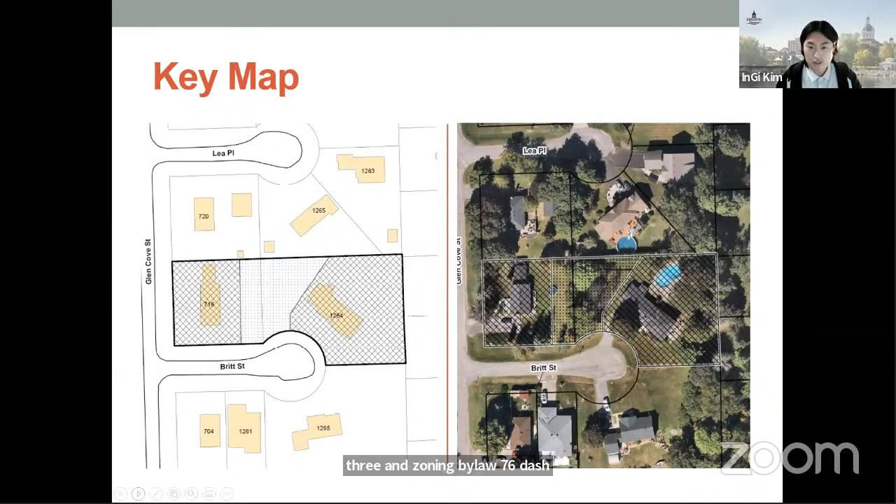Next slide, please. To give a quick overview, the applicant is seeking to create a new residential lot on the subject properties with 2 consent applications. The first application will sever a portion of the land at 1264 Britt Street, and the second application will sever a portion of the land at 716 Glen Cove and will be merged with the severed lot at 1264 Britt Street. Existing single-family dwellings will remain on the retained parcels, and both retained parcels and the newly created lot will comply with the minimum lot area and lot frontage required under the zoning bylaw.

Next slide, please. So the size of the severed and retained parcels are comparable to the existing residential lots in the area. Any future development on site will be subject to zoning provisions, including minimum front yard depth, rear yard depth, and side yard width. Finally, the proposed development will have no negative impact on the existing streetscape, as the retained parcels will maintain their existing accesses. Any new and or altered accesses to the property will require an entranceway permit.

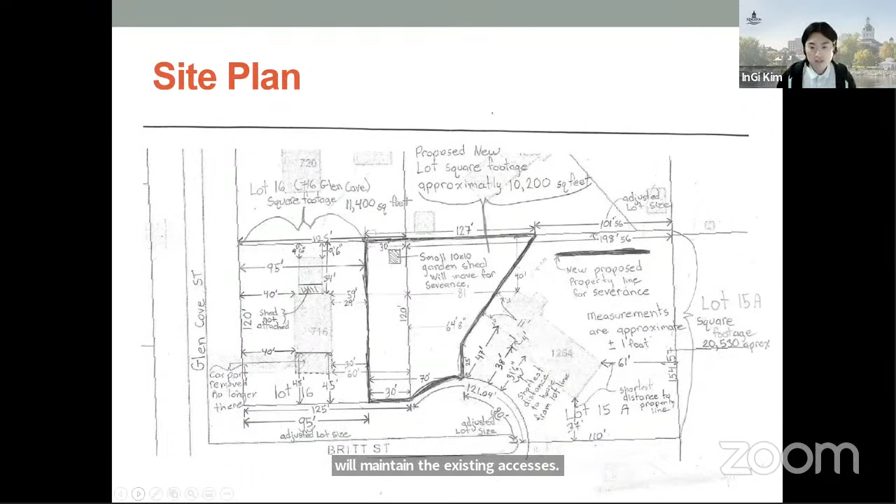Next slide, please. With respect to public consultation, a public notice sign was posted, a notice was mailed, and notification was made available in the Kingston Whig-Standard. As previously mentioned, these applications were moved up for your consideration as public comments were made during the delegated authority process, and a summary of public comments received and staff responses were included in the staff report for your consideration.

Next slide, please. In conclusion, this application is being recommended for approval to allow the creation of one new residential lot. The proposal maintains the general intent and purpose of both the official plan and zoning bylaw, and the proposal will improve the function of the underutilized portion of the site and represents good land use planning. With that, thank you, and I'll be happy to answer any questions.

Great, thank you very much for that. So at this point, I'd like to call on the applicant or their agent to identify yourselves by name and address for our record, please.

Hello, my name is Mark Labrie. I live at 1264 Britt Street.

And you are actually the owner? Yes, I'm the owner of both properties. Thanks very much for being here. Is there anything further you want to add to the application this evening? No, I worked hard to make sure it was within the rules of the city.

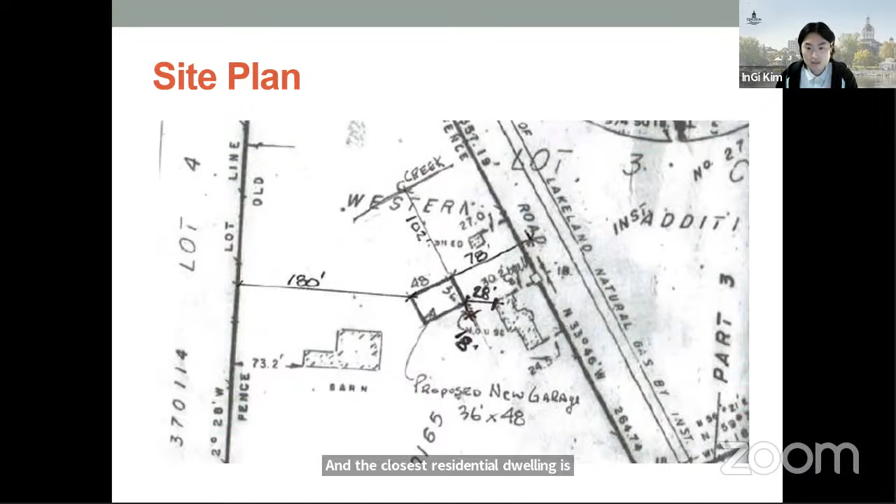The purpose and intent of a maximum accessory building height is to ensure that they do not dominate a property and do not have any negative impacts on the abutting properties. This site is sufficiently large and the building is well set back from neighboring properties and lot lines, reducing its overall impact on the surrounding area.

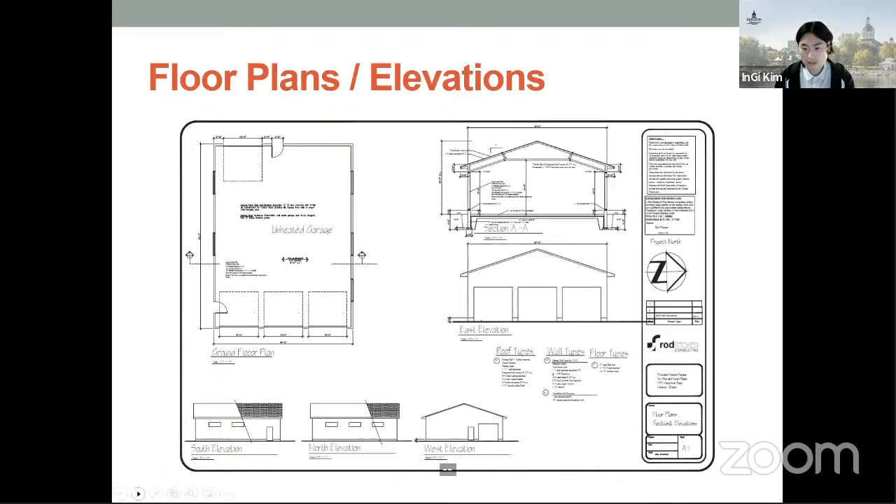With respect to public consultation, a public notice sign was posted, a notice was mailed to 14 property owners, and notification was made available in the Kingston Whig-Standard. To date, no public comments have been received.

In conclusion, the application is being recommended for approval to allow the construction of a new detached accessory building in the rear yard. The requested variance maintains the general intent and purpose of both the official plan and zoning bylaw. Further, the requested variance is minor in nature, and the proposed accessory building will improve the function of the existing residential use on the site. Thank you, and I'm happy to answer any questions regarding this application.

Thank you very much for that. At this point, I'd like to call on the applicant or their agent to identify themselves by name and address. It's Rod Stokes, I'm the agent for the owners, and my address is 324 Renda Street, Kingston. Thank you, Mr. Stokes. Is there anything further you want to add to the application? No, I think it's been covered quite well, but if there are any questions, I'd be glad to address them.

Very good, thank you. I'll call on the committee members. Do you have any questions of either the applicant or staff? If I may. Yes, Jordan.

Mr. Stokes, the sportsplex just down the road, it's a lot higher than 20 feet, right, in terms of the height of the structure? Most definitely. I honestly don't have the height of it, but I'm guessing it's probably as much as twice as high. I can think of the area, so I'm just curious because I don't think it'll be an eyesore at all. Thank you, sir.

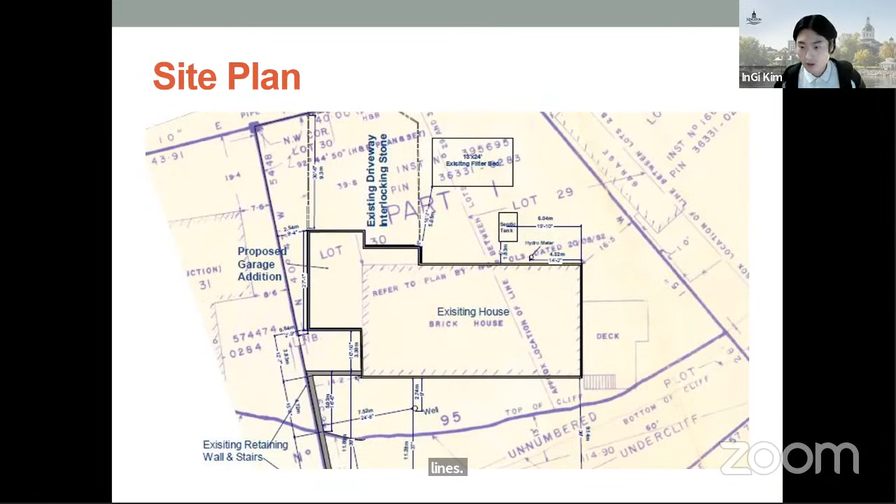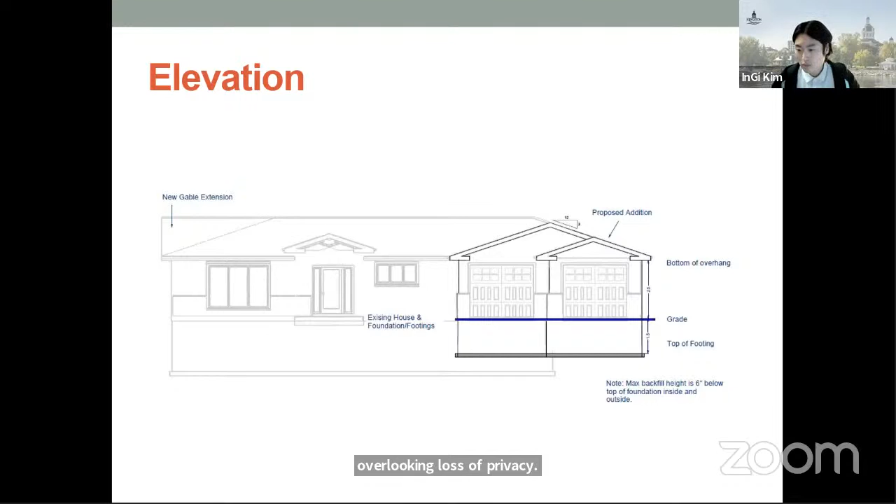The scale and design of the proposed development will be compatible with surrounding uses in terms of overlook or loss of privacy. No adverse effects are anticipated. There are no windows proposed on the west side of the building. Additionally, there is existing vegetation which will provide additional screening to the abutting property.

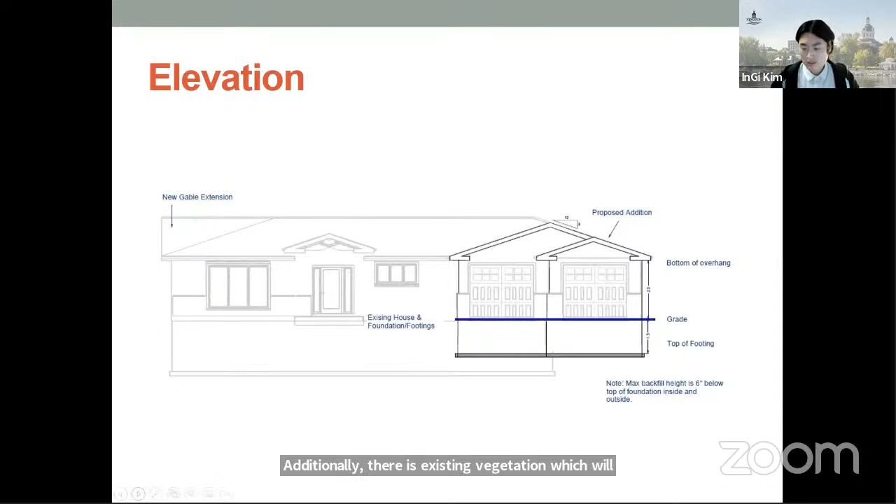With respect to public consultation, a public notice sign was posted, a notice was mailed to 18 property owners, and notification was made available in the Kingston Whig-Standard. To date, no public comments have been received for this application.

In conclusion, the application is being recommended for approval to allow the expansion of the existing attached garage in order to accommodate 2 vehicles. The requested variance maintains the general intent and purpose of both the official plan and zoning bylaw. Further, the requested variance is minor in nature and the proposed development represents good land use planning and will improve the function of the existing residential use on the site. Thank you, and I'll be happy to answer any questions.

Okay, I would like to call on the applicant and/or their agent to identify themselves by name and address.

Hi, Ron Voskamp, I'm the homeowner. Address is 39 Rudd Avenue.

Do you have anything to add to the application? I thought InGi did a great job presenting the information. Okay, thank you. So now, committee members, do you have any questions for the applicant or agent?

If I may, Mr. Vice Chair. So my calculation here, 1.66 meters means it's a reduction to 5'5" here. Are we losing any vegetation, any trees in the addition here with this garage? There's a couple of trees that have already been severely pruned, I guess, because they've been growing into our neighbor's house. Okay, but you still got other trees on the side there that's going to give you some coverage. There is, exactly, especially more towards the road. Thank you, sir.

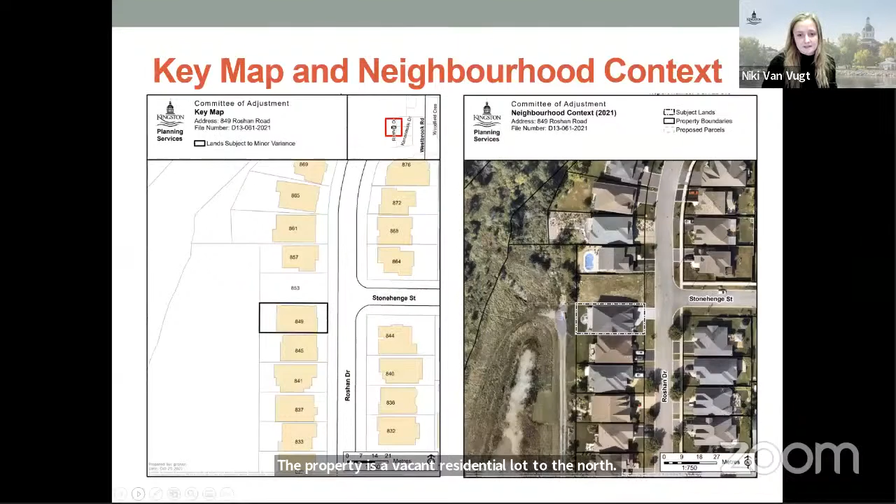The applicant is proposing to construct a 44.74 square meter deck along the rear of the existing single-family house. The minor variance is ultimately triggered due to the proposed deck height of approximately 10 feet, which requires more prescriptive measures to ensure overlook and privacy concerns are mitigated.

The subject property can utilize multiple existing site characteristics to mitigate potential overlook concerns into nearby yards, as the land to the west is zoned open space and EPA, and the existing property exceeds the required side yard setbacks, interior side yard setbacks, and is abutting the vacant residential lot to the north, as well as the residential lot to the south. It is anticipated that the proposed development will have no impact on the existing streetscape as it is located in the rear of the building.

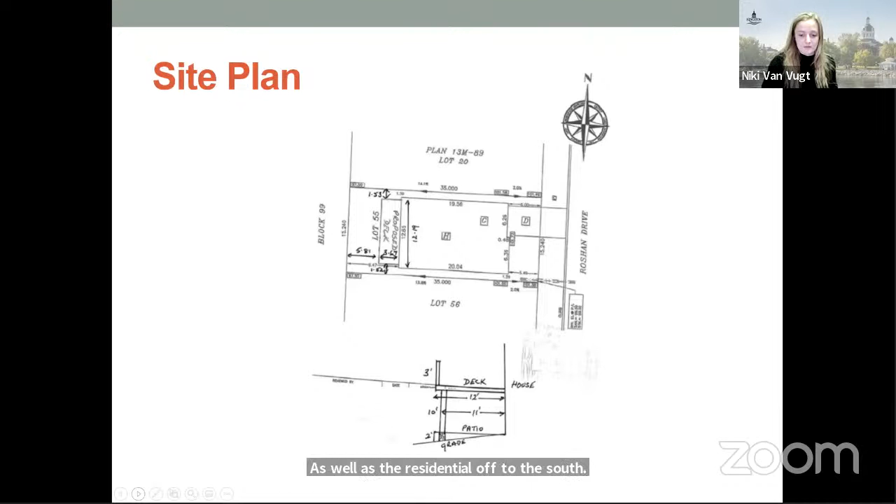Next slide, please. The proposed rear yard deck provides new opportunity for growth and investment within Kingston in a manner that would ensure compatible development and land use. The deck will result in development that is consistent with the built form of existing rear yard decks found in nearby residential properties located along Roshan Drive. The scale and design of the proposed development appears to be compatible with surrounding uses.

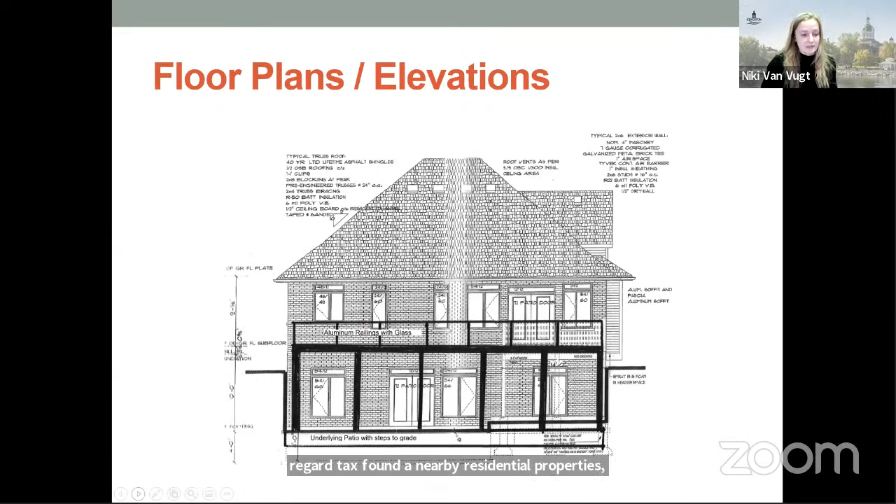Next slide, please. With respect to public consultation, signs were posted on the subject site 10 days in advance of the meeting. Notices were sent by mail to a total of 20 property owners, and a courtesy notice was placed in the Kingston Whig Standard. To date, no public comments have been received.

Next slide, please. With respect to our recommendation, the requested variance maintains the general intent and purpose of the official plan and zoning bylaw. The proposal is desirable for the appropriate development or use of the land, and as such, the proposed application meets all 4 tests under the Planning Act. Approval of this application will permit the construction of an elevated deck at the rear of the existing single detached dwelling. Thank you for your time, and that concludes my presentation.

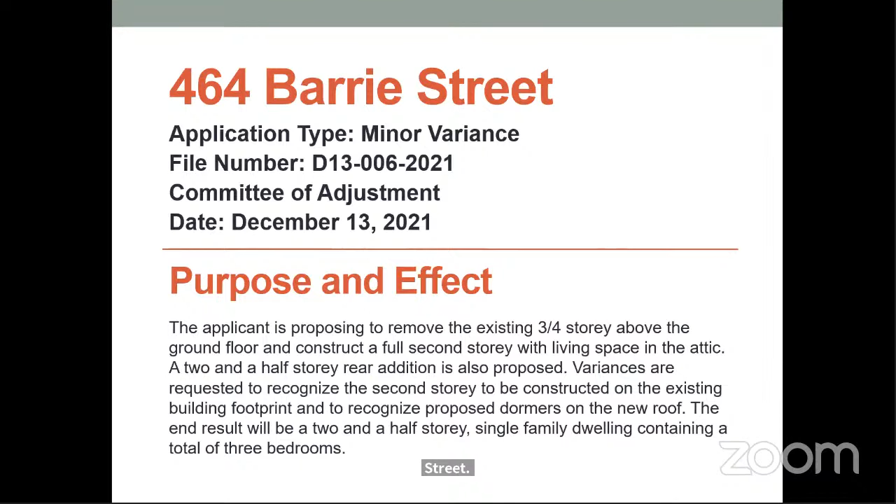The minor variance application is requested in order to remove the existing 3/4 story above the ground floor and construct a full second story with living space in the attic. A 2.5 story rear addition is also proposed.

The variances are requested to recognize the second story to be constructed on the existing building footprint, and to recognize proposed dormers on the new roof. The end result will be a 2.5 story single family dwelling containing a total of 3 bedrooms.

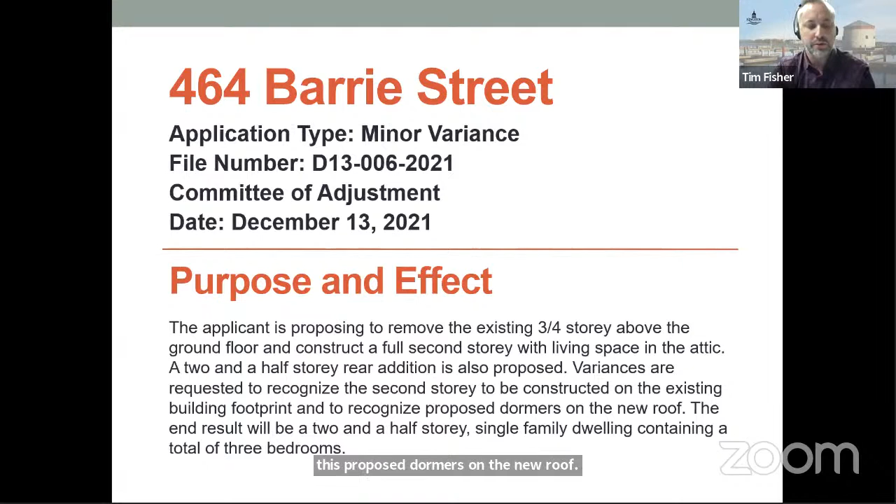The subject site is located at 464 Barrie Street. The site has approximately 323 square meters in area and approximately 9.9 meters of frontage on the west side of Barrie Street. The subject property is designated residential in the official plan and zoned 1 family dwelling and 2 family dwelling A zone in zoning bylaw number 8499.

The site is developed with a 1 3/4 story single family dwelling containing 3 bedrooms. The subject property is located in a residential neighborhood consisting of a mixture of 1 and 2 story, or 1 and 2.5 story dwellings. The subject property is adjacent to a 2.5-story dwelling to the north, a 2-story dwelling to the east, a 2-story dwelling to the south, and a 2.5-story dwelling to the west.

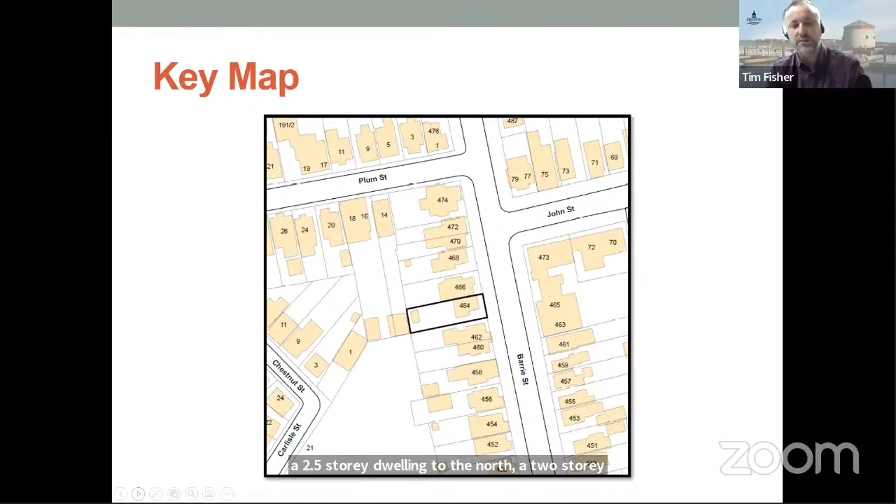The requested variances here, they're asking for a reduction in the minimum side yard and the minimum aggregate side yard, and that is for recognizing the existing structure, being able to build on the existing footprint and build up from the existing footprint. And then there's 3 additional variances here for the proposed dormers on the new roof line.

The intent of the dormer provisions is to avoid large shed-like dormers, which will result in the modification of the majority of the roof to accommodate living space in the attic. The height of the proposed new roof will provide adequate height for living space.

3 dormers are proposed on the roof, which are intended to provide natural light and ventilation in the attic space. The dormer located on the north side will have no windows and is requested in order to provide ceiling height in order to accommodate the internal stairway and landing.

The dormer requires a variance from the setback from the end of the roof. The dormer cannot be relocated or shrunk in size as a result of the location of the internal stairway.

The second dormer is located on the south roof line, which complies with the dormer provisions. The dormer will provide natural light and ventilation to the office area. The third dormer is located on the west roof line and will provide ventilation and natural light to the den and attic. The roof line is approximately 7.3 meters in width.

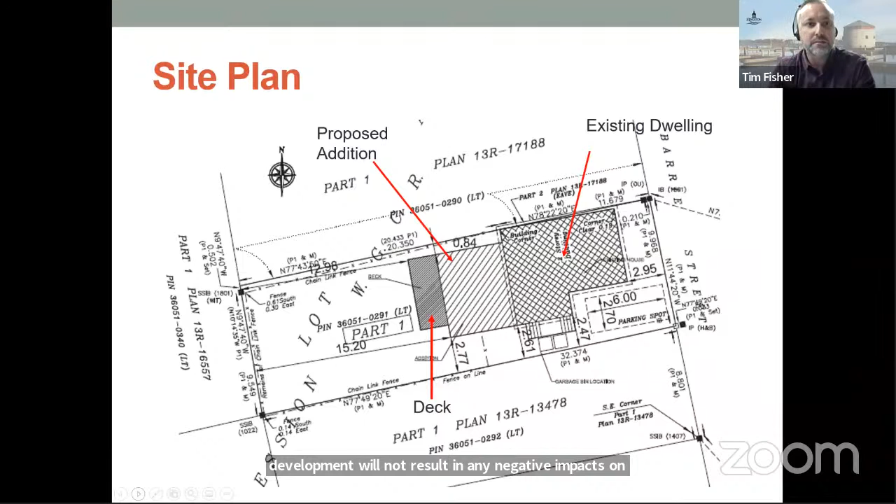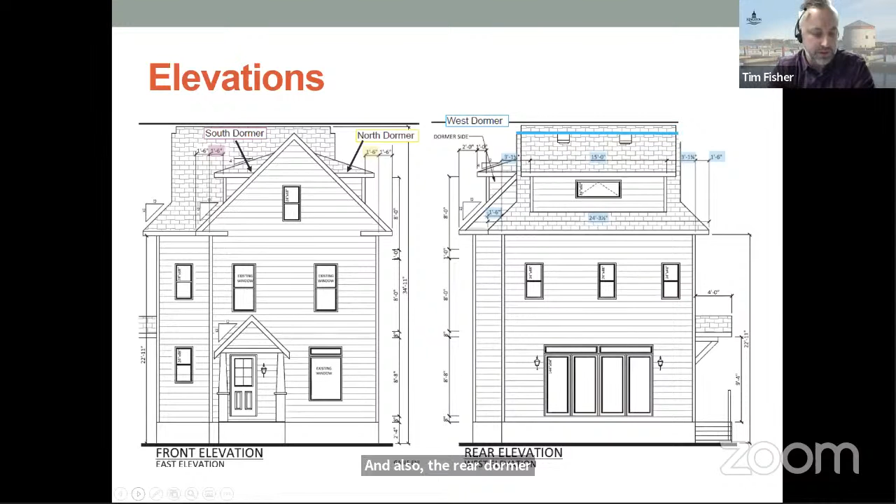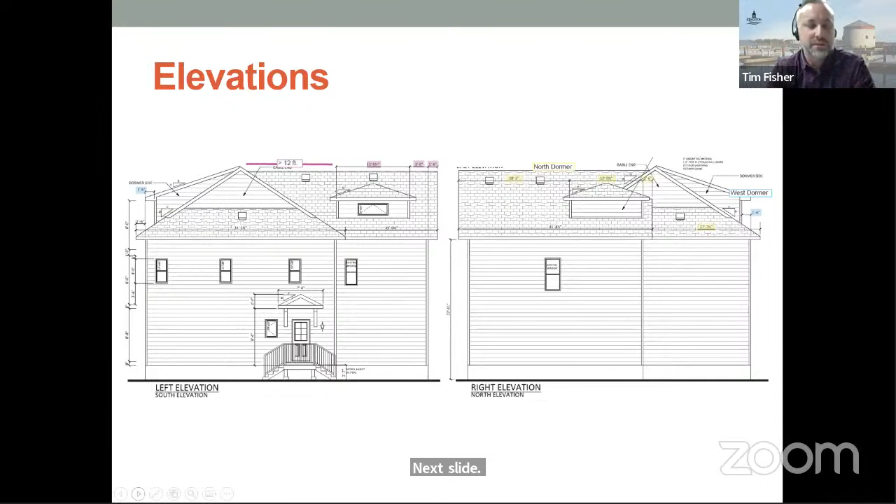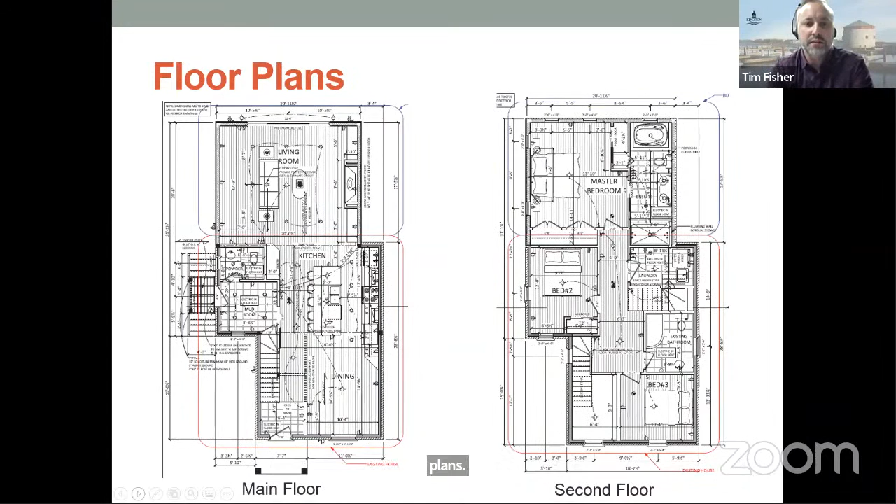There we go. So here we show the main floor and second floor plans. As you can see, the second floor is going to be built using the existing footprint, which is mirroring obviously the main floor. Next slide, please.

And the floor plan for the attic space. And as you can see, the need for the dormers would provide the natural light and airflow for the areas within the attic space.

So the proposed 2.5-story dwelling is similar to the existing massing and character and architecture in the residential neighborhood. The rear addition will provide common living space and living room for the residential use, and will provide access to the rear yard through a deck and sliding doors along the rear wall.

The existing dwelling contains a maximum of 3 bedrooms. The proposed addition will maintain the 3 bedrooms on the second story. However, as a result of the rear addition, a master bedroom suite will be created within the new second story, while the remaining second floor will be renovated to provide 2 bedrooms, an updated washroom, a laundry room, and a stairway leading to the attic space.

A crawl space is proposed within the rear addition. Therefore, additional living space is proposed within the attic space. The attic will provide an office area, recreation room, and den. The proposed dormers will obviously provide natural light and ventilation to the attic space.

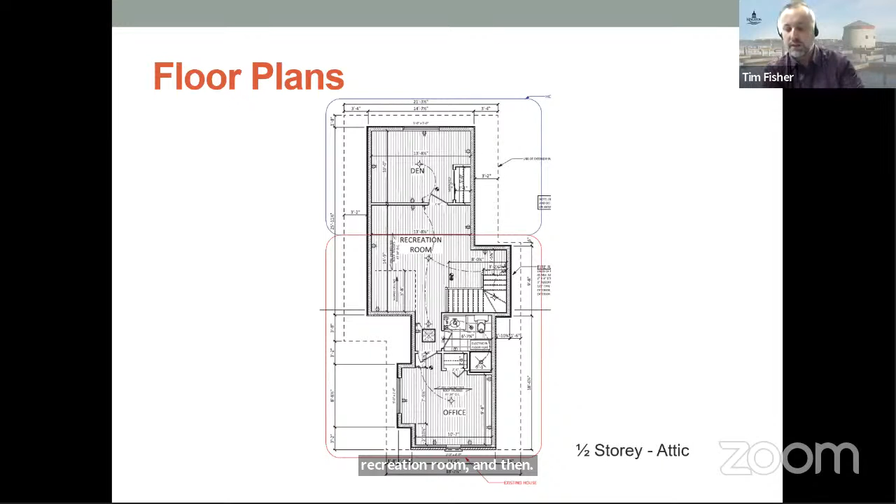So signage was posted on the property and notice was mailed to 37 property owners 10 days prior to the meeting. And also a courtesy notice was placed in Kingston Whig-Standard. Next slide, please.

For our recommendation, the requested variances maintain the general intent and purpose of both the City of Kingston official plan and zoning bylaw number 8499. The proposal is desirable for the appropriate development or use of the land, building, or structure. And the requested variances are minor in nature. As such, the proposed application meets all 4 tests under subsection 45(1) of the Planning Act, and the application is being recommended for approval subject to the proposed conditions.

Approval of this application will provide additional living space to an existing single detached dwelling and is anticipated to have no negative impacts on the abutting residential uses or their continued use and function of their lots. I will leave this in your hands.

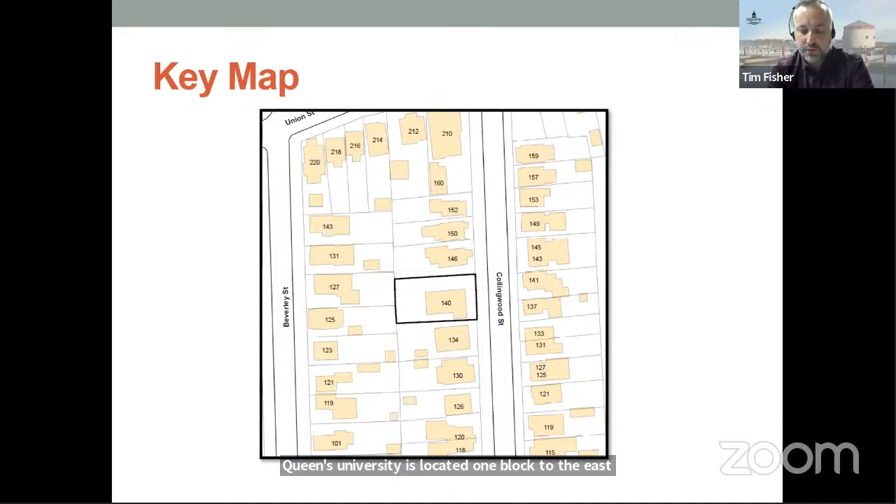As stated, the applicant is requesting a variance to the maximum permitted residential building depth. The requirement is 15 meters, and they are proposing 18 meters, which is a variance of 3 meters.

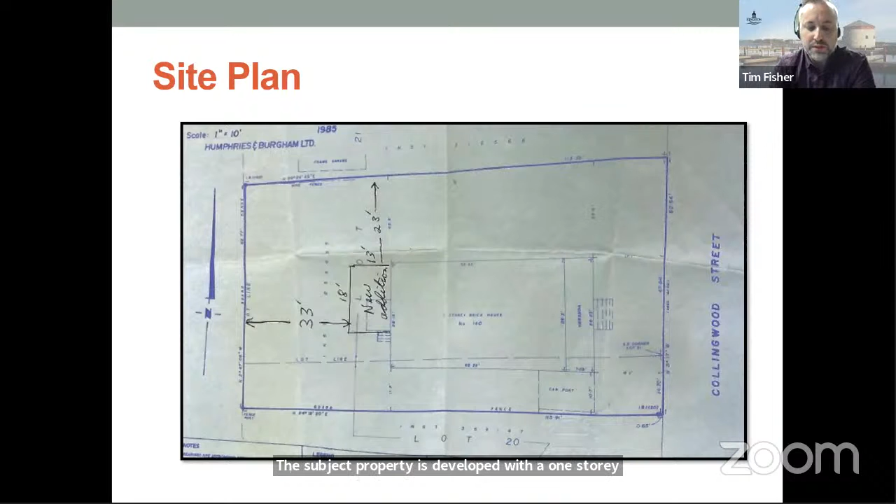The subject property is developed with a 1-story single detached dwelling. The proposed 21 square meter 4-season sunroom at the rear of the dwelling will provide additional living space to the residential use. The proposal will not result in any new units or bedrooms.

The sunroom is located at the rear of the dwelling and will not be seen from the street. A rear yard will be maintained for outdoor amenity space. The height of the sunroom will not exceed the height of the existing dwelling and will provide a similar roof pitch as the dwelling itself.

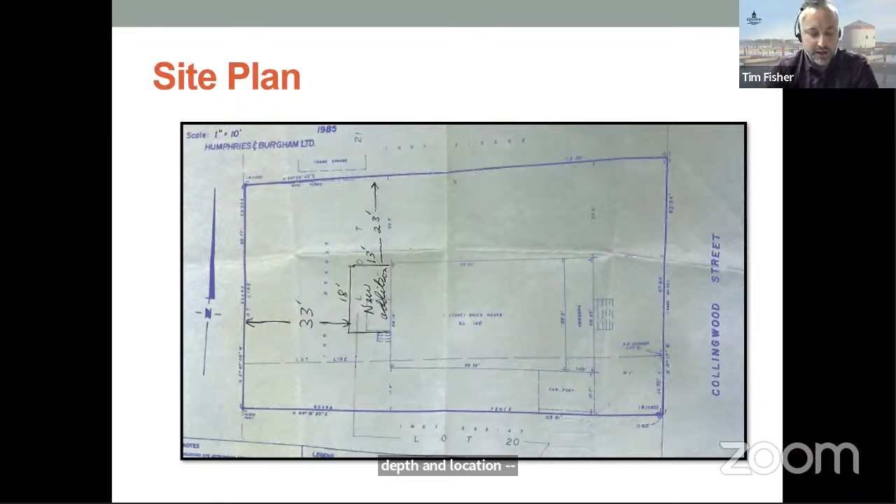The increase in residential building depth will be in keeping with the scale and building depth of other residential development in the neighborhood. Approval of the variance will not result in the increase of the building depth for the entire lot. The variance is only applied to the building depth and location of the proposed sunroom only. Any further development on the subject property is to comply with the performance standards of the zoning bylaw.

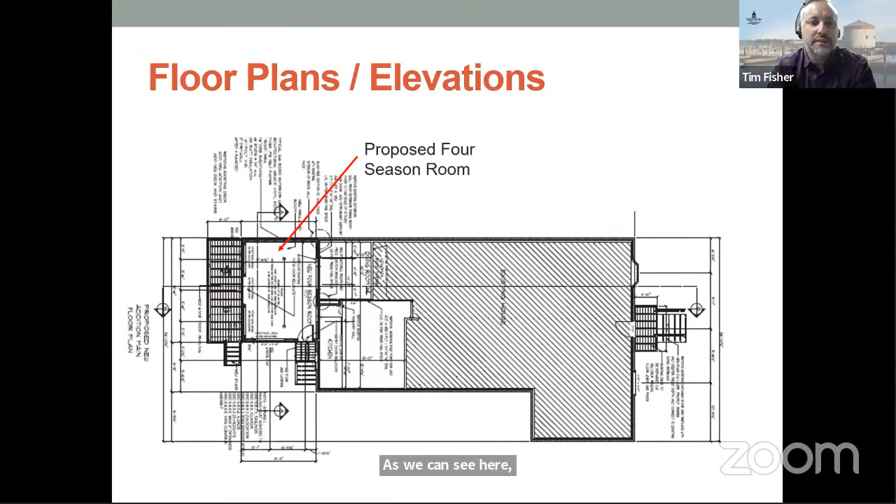As we can see here, the area of the existing house and the location of the proposed sunroom at the rear.

Here they provided us with elevations showing the roof line. At the bottom left, the rear elevation, you can see that the roof line of the sunroom matches the pitch and roof line of the existing house. In the left side elevation, as you can see in the middle, you can tell that the sunroom will not be any higher than the existing roof line of the structure and won't be seen from the street.

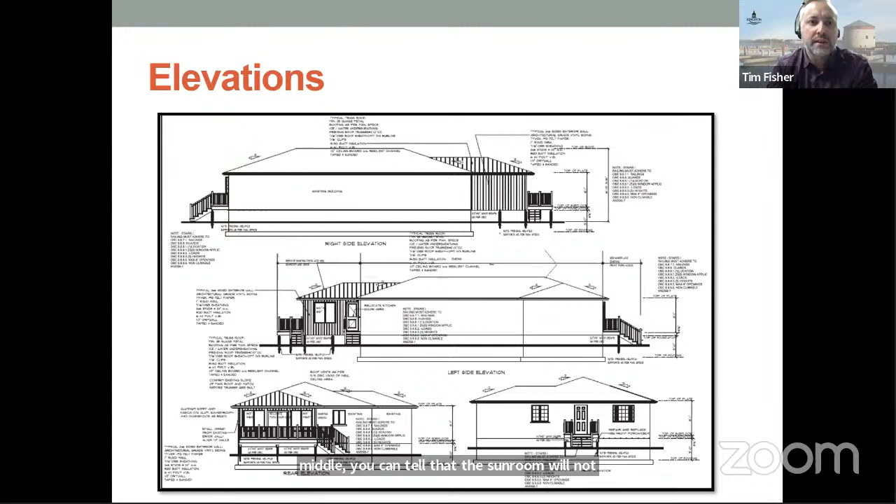Signage was posted on the property and a public notice was mailed to all property owners within a 60-meter radius of the property, and approximately 45 property owners received the letter. To date, we received no public input regarding this application.

The requested variance maintains the general intent and purpose of both the City of Kingston official plan and zoning bylaw. The proposal is desirable and appropriate development or use of the land, and the requested variance is minor in nature. As such, the proposed application meets all 4 tests under subsection 45(1) of the Planning Act.

The application is being recommended for approval subject to the proposed conditions. Approval of this application will permit the construction of the 21 square meter 4-season room to be constructed at the rear of the existing single-family dwelling, which will provide them with additional living space.

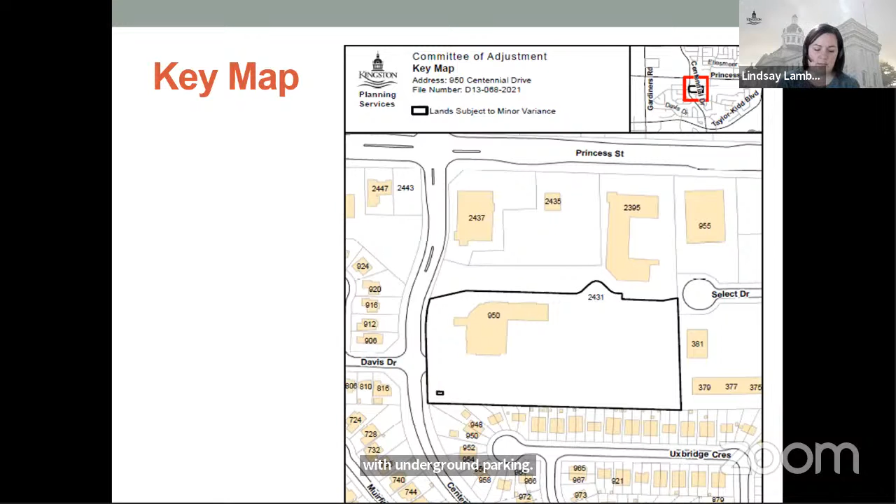The subject property is located on the east side of Centennial Drive, south of Princess Street. The site is developed with an existing 7-story retirement residence with 165 units. A phase 2 addition is proposed to the existing building that is to match the existing height and setback to the existing residential neighborhood to the south. Phase 2 is proposed to contain 86 units with underground parking. The subject lands are designated arterial commercial in the official plan and are zoned C5-7 in zoning bylaw 76-26. Next slide, please.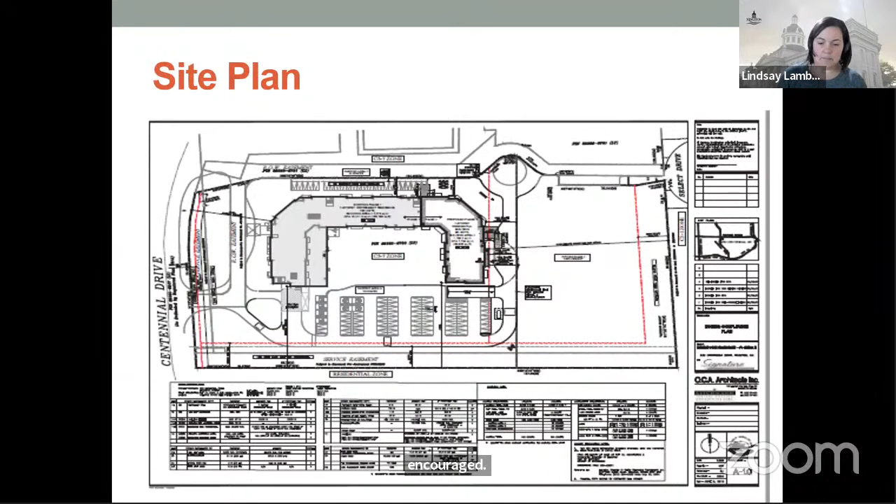The concept plan includes the footprint of the proposed phase 2 addition, as well as the proposed lot line that will be submitted with a future consent application to create a separate parcel from phases 1 and 2. The application facilitates additional compact residential intensification on an underutilized parcel within the urban boundary and within a corridor where such infill and redevelopment is encouraged. The proposed phase 2 addition is the subject of an active application for site plan control modification. Next slide, please.

Notice of the subject application has been provided in accordance with the Planning Act, and a courtesy notice was placed in the Kingston Whig Standard. To date, staff have received one piece of correspondence, and that has been included in this evening's addendum. The piece of correspondence expresses concern with the proposed setback of the phase 2 addition and its implications for construction impacts on the neighboring residential subdivision. Staff would like to note that the interior side yard is not part of the application before you this evening. The proposed addition exceeds the minimum 15-meter interior side yard of the C5-7 zone. Staff consider the concerns to be addressed as they are not related to the zoning relief sought through the subject application.

Next slide, please. In summary, the application does meet all 4 tests under subsection 45(1) of the Planning Act. Approval of the application will facilitate further residential intensification in a compact form on an underutilized serviced property within the city's urban boundary, in a manner that achieves compatibility with adjacent properties and meets the functional needs of future and current residents. In conclusion, the application is recommended for approval, subject to the proposed standard conditions included in the staff report. That concludes my presentation.

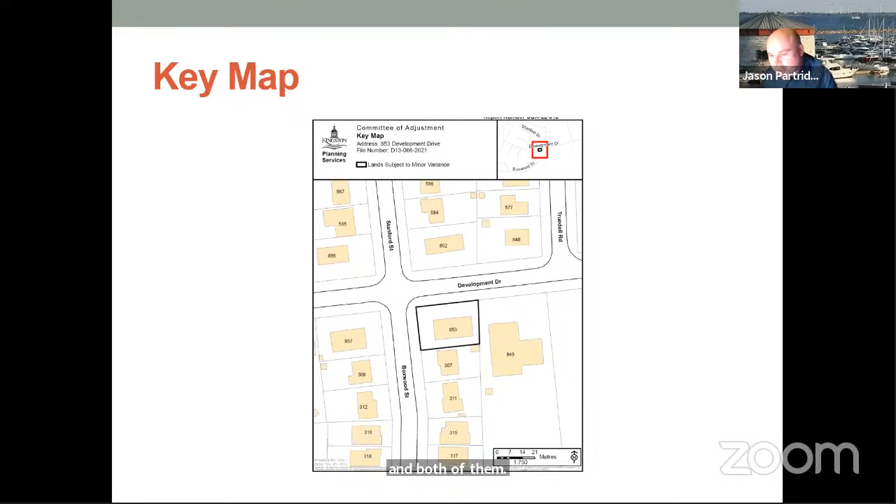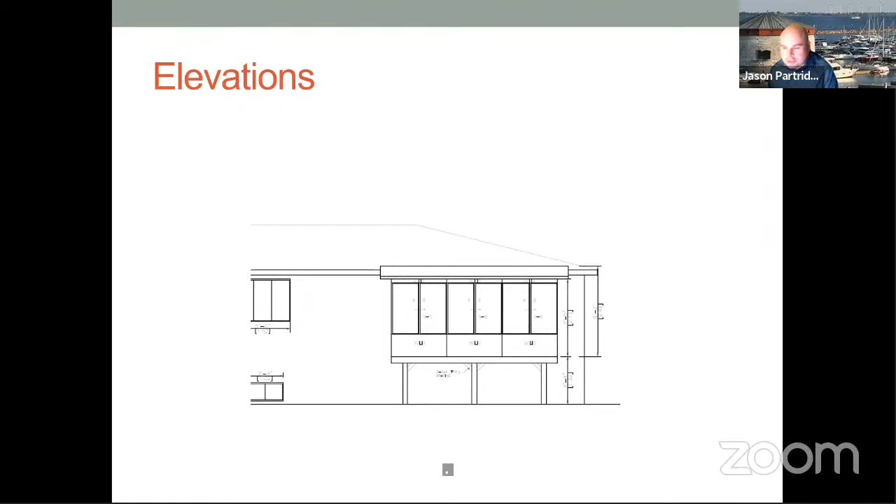So this just shows the one-story enclosed three-season sunroom that would be located in the side yard of the property. Next slide, please.

The requested variance maintains the general intent and purpose of the City of Kingston official plan and zoning bylaw 7626. The proposal is desirable for the appropriate development or use of land, building, or structure, and the requested variance is minor in nature. As such, the application meets all 4 tests under section 45(1) of the Planning Act, and an application is being recommended for approval subject to the proposed conditions.

Approval of this application will allow for the construction of a one-story, three-season enclosed sunroom within the side yard of the property. As of today, we've received one letter in support from the public, from one of the neighbors, and that was included in the addendum sent out by Derek today. That's everything, thank you.

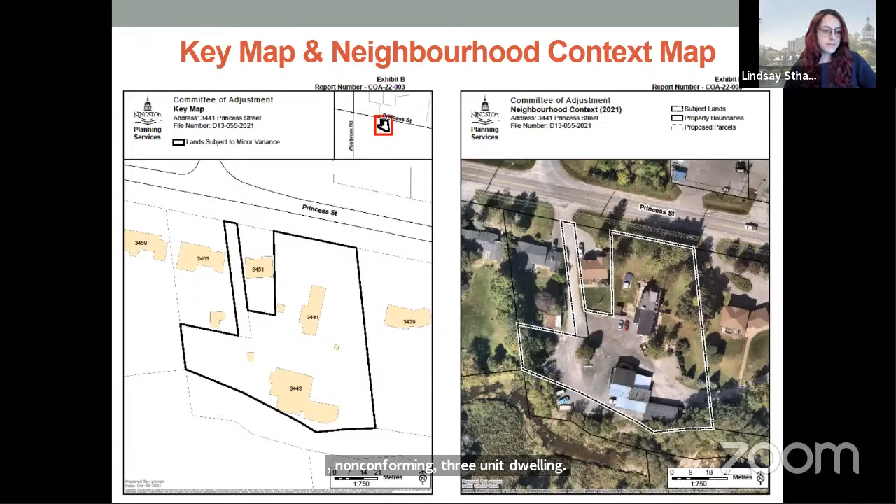The applicant is requesting permission for 2 aspects of their proposed development. The first is to increase the amount of uncovered parking area. The second is to expand the office use throughout the entire rear building, which includes additional floor area proposed in a taller portion of the existing building. Next slide, please.

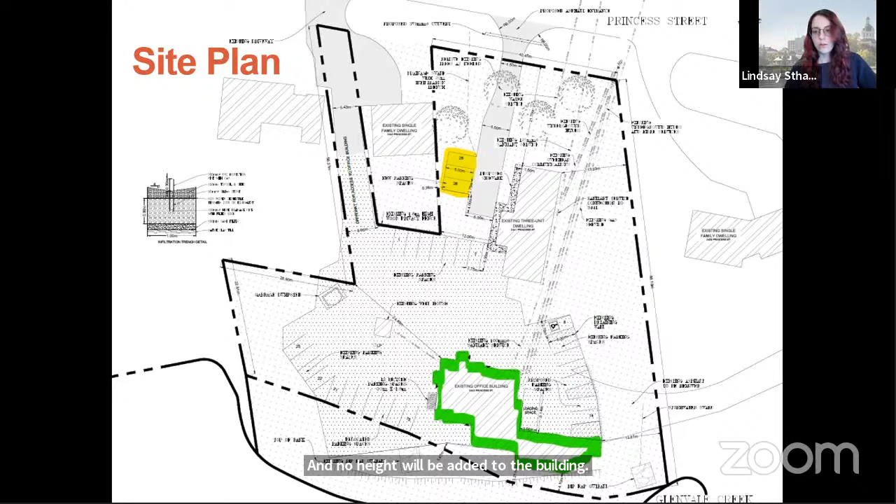I've highlighted the site plan here to show the 2 impacted areas. The yellow shows the increased parking area - these are the 3 proposed parking spaces for the residential use at the front of the property. The green is just an outline of the existing footprint of the rear building. That footprint is not proposed to be expanded, and no height will be added to the building. All development of the rear building will take place within the existing footprint and under the existing roof. Next slide, please.

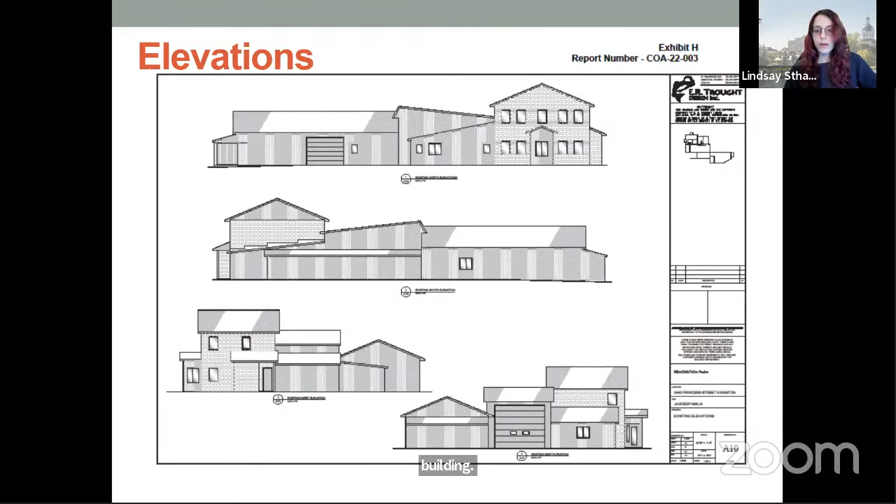These are the elevations of the existing rear building. As I've noted, no exterior changes are proposed as part of the conversion to professional office use. Next slide, please.

Two signs were posted on the property. Notice was mailed and a courtesy ad was placed in the Whig Standard. No public comments have been received for this application.

I'll also note that this property was subject to a Committee of Adjustment application in 2002. That application allowed the previous owners to build an addition on the rear building for an office use associated with the trucking facility. Through that application, planning acknowledged the existing legal non-conforming status of both the use and the structures on the site. Next slide, please.

The planning department recommends approval of this application, subject to the conditions found in Exhibit A. And I leave this in your hands, Mr. Chair.

At this point, I'd like to call on the applicant or the agent to identify yourself by name and address for the record, please.

My name is Jagdeep Walia. I'm here and I cannot start the video.

Is there anything further you wish to add to the application? No, I don't want to add anything.

And thank you, Lindsay. That was a wonderful job done. Yeah, and that it was.

Committee members, do you have any questions for the applicant or for staff? I'm seeing none, so I'll open the public portion of the meeting.

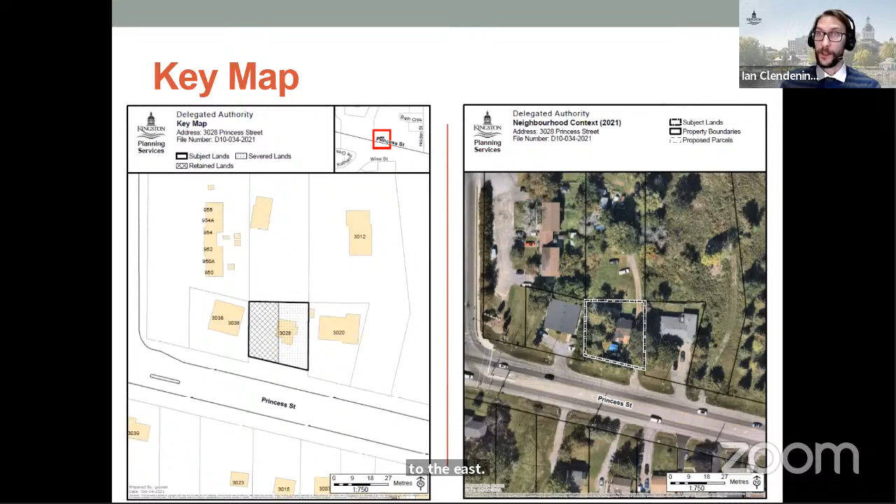Here we see the slide of the proposed severed and retained parcel, each having roughly 15.2 meters of frontage and carrying the projection of the rear lot lines of the adjacent properties. The development is in compliance with the Residential Type 1 zoning in which the property is situated.

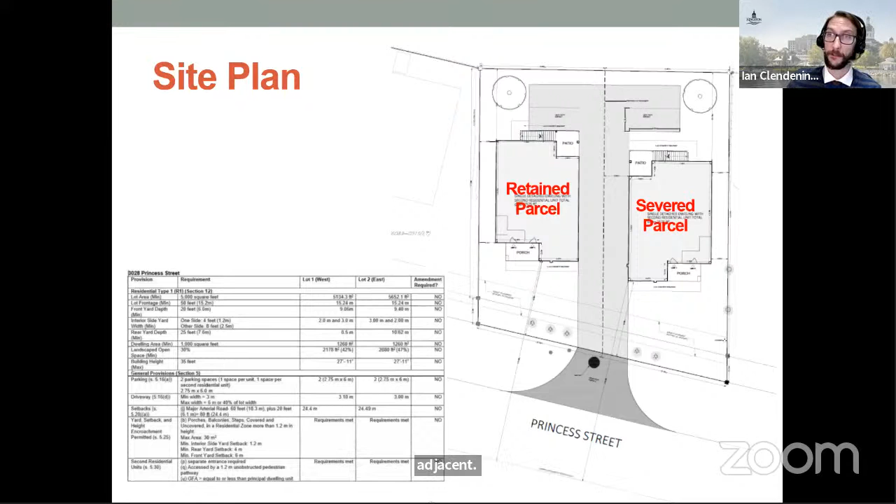If we could go to the next slide, please. This again is just highlighting the prior consent for this committee's understanding, if they're not already familiar with it. The rear lands, a broad swath measuring just less than 3,000 square meters, are being added to the abutting parcel for a broader development not anticipated to be part of this application, which the prior slide shows as two dwelling units fronting onto Princess Street.

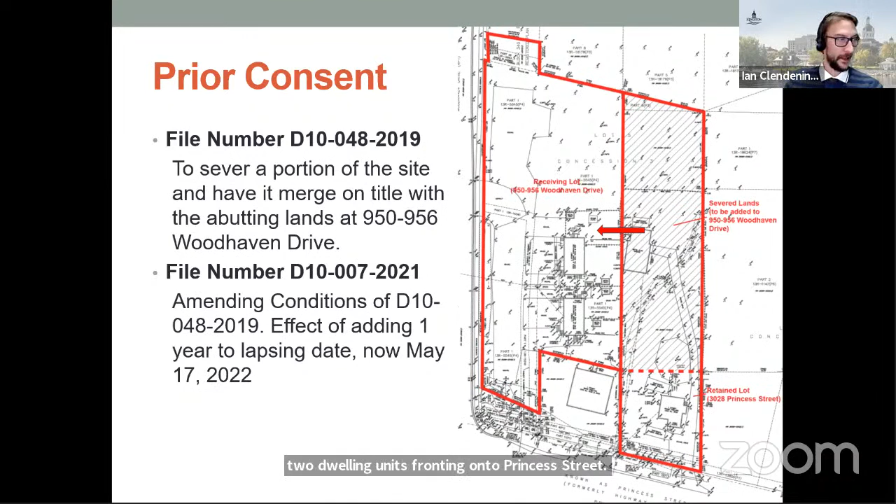So with that, I'd like to go to the next slide, highlighting here the public consultation. On initial posting of the property and subsequent mail out, we did receive one piece of general objection.

As well as a more elaborate correspondence indicating a variety of concerns which are generally addressed in the report. Some of those issues are with respect to storm drainage, flood setback, and developability, and the lot frontages being inconsistent. We did receive further correspondence going into further detail.

I'd like to highlight that the correspondence identified two mistakes in the report. One incorrectly identified that Princess Street at that location is serviced by Express Transit, when in fact the existing number 502 bus service, which traverses Princess Street, terminates or turns off at Bay Ridge Drive, roughly 870 meters east of the site. Also, the report mistakenly references the severed lands as the retained lands and vice versa.

I want to highlight that while the official plan does direct growth to areas serviced by existing infrastructure, including bus service, and sets out policy to support and promote transit use, it is recognized that not all development will take place in such areas. The subject lands are located within the urban boundary, and the redevelopment would be on full municipal water and wastewater services. The services available are adequate for the proposed minor intensification.

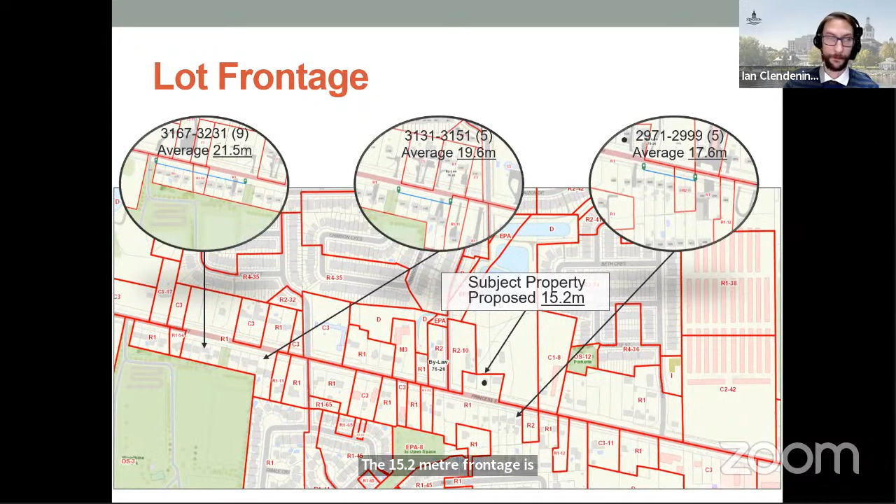If we could go to the next slide, please.

So if we could change to the next slide, please.

One of the concerns identified in the correspondence was that the water course, and specifically the floodplain, would preclude the development given a required setback of 25 feet from the floodplain. This is a requirement of the zoning bylaw.

While detailed mapping has not been done, that is a component of CRCA's conditions: a hydrologic and hydraulic analysis that would delineate the floodplain of that water body, as well as identify any remediation or mitigation measures such as balance, cut, fill, or other engineering methods to address the hazard if possible.

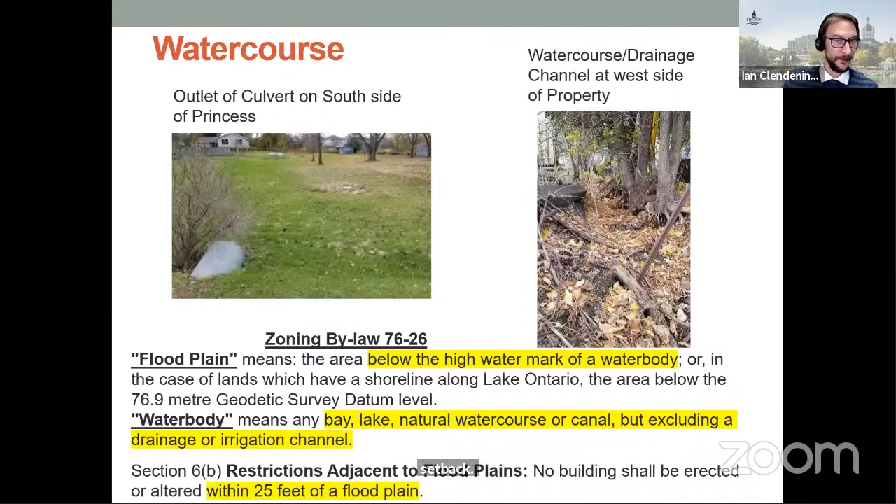Throughout the circulation process, staff circulate to a variety of internal and external agencies. The circulation has identified a variety of studies required for prudent development of the site. This includes a request for a noise study to demonstrate compliance with standard codes of NPC 300 by the province.

Engineering recommends that the driveway be in a shared easement. This was confirmed by the applicant as the original intent. This allows for a greater width for entry and exit without trespass onto the abutting property, and again minimizes the interface with the street, lessening the visual impact on the streetscape.

Additional requirements include that changes to grading and/or drainage shall not adversely affect the neighboring properties, and of course this would be demonstrated through studies.

A stormwater management brief is also required, demonstrating pre- to post-development water quantity controls for the 2 to 100-year storm events, and normal level quality controls.

As highlighted earlier regarding the possible flood risk, there is a requirement for hydraulic analysis. There is further a modified condition set out in the Addendum Report where we are asking that the dwelling be removed. Of course this was expected, but including it in the conditions reinforces the actual requirement that it be done.

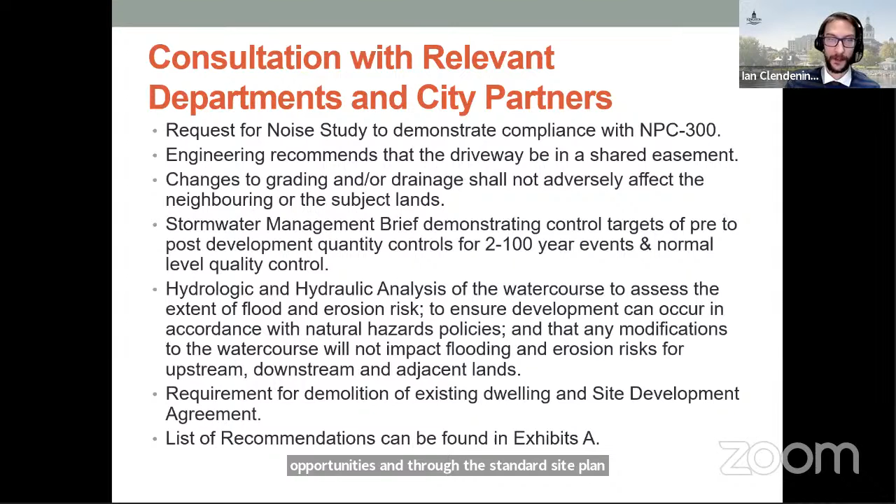Finally, as included in the planning report, it is staff's recommendation that the committee approve the application for consent. The proposed severance is consistent with the provincial policy statement, the official plan, and complies with the zoning bylaw. Further, subdivision control is not necessary for the proposed severance. As referenced above, approval is recommended subject to the conditions set out in the revised Exhibit A.